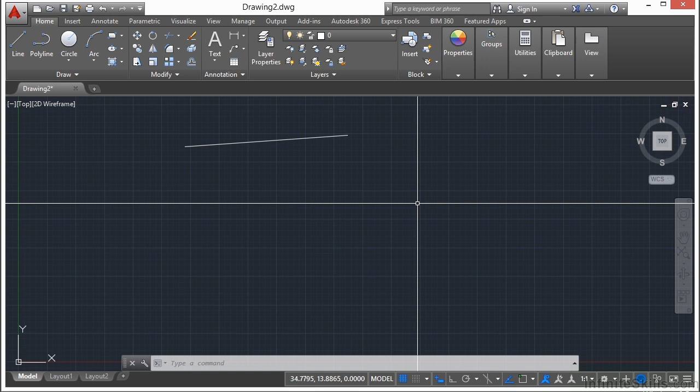So I'm going to erase this line here so that we have a clean drawing to work on. So we're going to draw a horizontal line that's 50 feet across.

First, let's start with a blank drawing, and I wanted to make sure that we're working in architectural units. So type in the word units, press enter. Make sure we're in architectural and we're in inches, which we are. And when you switch to architectural, the insertion scale should automatically switch to inches, but always double check it just in case. Everything we draw at 1 to 1, meaning 1 unit is going to be 1 inch long.

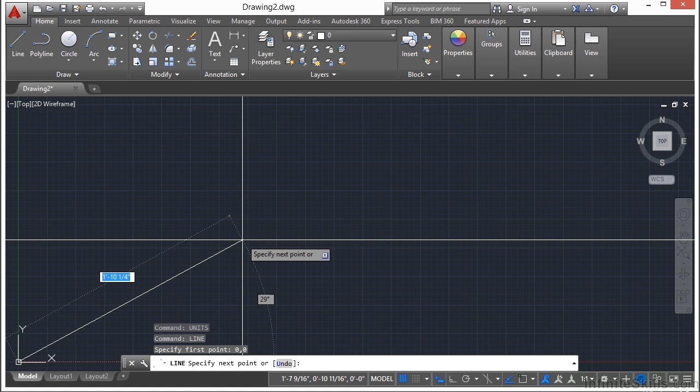So let's start the line command. Let's put our first point at the origin, or at coordinate 0, 0. Press return. You can pan and zoom to get close to it so that you are kind of in the right area.

Now what we're going to do is draw a horizontal line 50 feet to the right. Now there are a lot of different ways you can do that. You can turn on your ortho command, and that will lock you in orthogonally, or horizontal or vertical. And we want to draw it 50 feet to the right. Now remember, we're working in inches for our units, so if we type in 50, it will draw the line at 50 inches. But we want feet, so we can type in 50 and then put in an apostrophe or the foot symbol.

AutoCAD will say, okay, you're drawing 50 units. Oh, but these units are feet, not inches. Okay, I will convert it and do the math - it's real smart that way. And boom, there's our line.

I'm going to press return, then double click on my scroll wheel for a zoom extents, and here we go. We have our first line of our house that is 50 feet long. One way to check the length of an object real quick is to select it and then hover over one of the grips, and it will give you some basic dimensions. So we can see here it's 50 feet long, which is exactly what we wanted.

When you're working in architectural units, you draw in inches. There are 12 inches to a foot, so 12 times 50 is 600. You can type in 50 apostrophe like we just did for our 50-foot long line, or you can also type in 600, which is 600 units, which is 600 inches, which is 50 feet.

Now, if we needed to draw something at 50.5 feet or 50 foot 6 inches, you can. You just type that in as 50 apostrophe 6. No spaces, no separators, nothing like that. And it will draw it at 50 feet 6 inches.

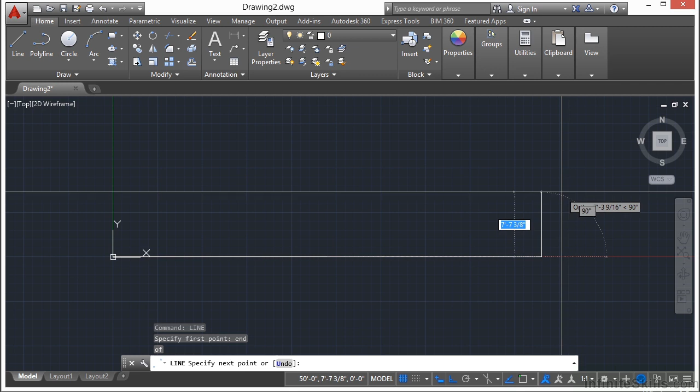Started from that end point of that line, and we want to go 30 feet. So type in 30 apostrophe. Make sure your cursor is moved up above the line here so that we can continue drawing up. Press return, keep the command going. And you can zoom out with your scroll wheel and pan around as well.

Now we're going to go back to the left, so we want to type in 50 feet, 50 apostrophe. Make sure your mouse is moved to the left before you type it in. Press return. And now we're going to do the same - we're going to go at 30 feet, but down. So press return again. And there's the basic outline for the front of our house.

Remember that glitch in AutoCAD that sometimes keeps you from zooming or panning? You can type in REA to refresh your screen.

Now we're going to draw the roof. It's just a simple triangle that we're going to do. Start the line command again, type in E and D for your osnap overrides, press enter, and snap to this point.

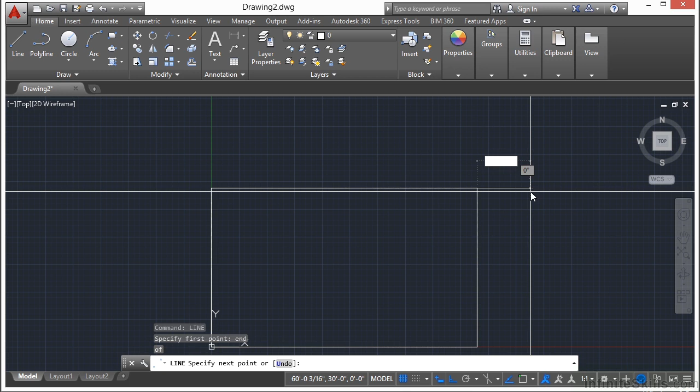And we're going to draw 5 feet to the right. So 5 feet, or again, remember we're in inches, so you can type in 60 for inches, but no inch mark - you don't have to do that. Press enter. That went over 5 feet.

Remember, you can also draw in polar coordinates, or more typically in relative polar coordinates. That means that you can draw lines based on length and angle. To do this, you again start the line command unless you're in it already. You pick your first point - right now, our first point is right here. And then with the dynamic input on, like I have on right now, you just type in your length, press the tab key, and then the angle.

Now, I've already done the math ahead of time, and I'm going to put the top of our roof right about here. So I know what has to be done. I'm going to type in 40 feet, then press the tab key.

Now I'm going to enter in the angle. Because my ortho command is on, it's going to automatically enter in angles according to every 90 degrees. So I'm going to turn that off with this toggle switch here, and now you can get a better look at it.

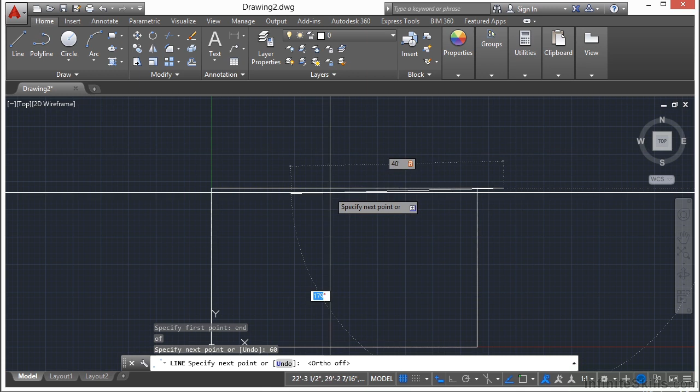Now remember, when you draw an angle in AutoCAD, 0 degrees is to the right on a perfectly horizontal line. 90 degrees starts here and then goes counterclockwise until it's straight up. 180 degrees is continuing on down to here, and that's where it goes. So remember, it starts on the right and then goes counterclockwise.

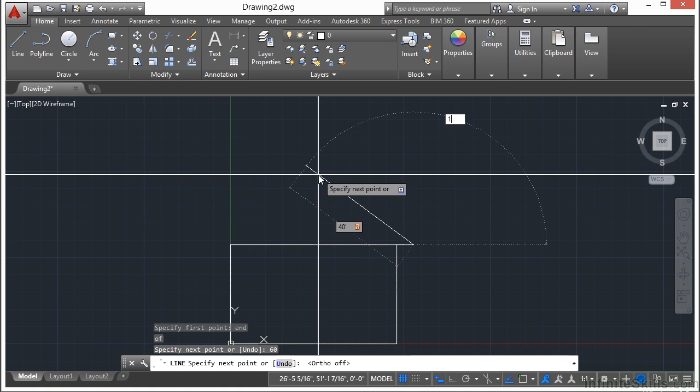So we want our angle to look a little bit like this. I've already figured out what our angle needs to be, and that's going to be 138.59. And there's our angle.

Okay, now I'm going to draw my line down in the opposite direction. Now I need 40 feet. Make sure you type in the feet, press tab. And I need to type in my angle.

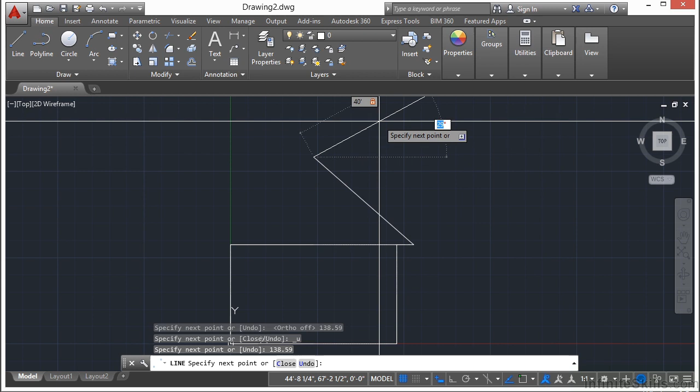Now, angles can get kind of tricky. Sometimes they can be relative to where your mouse location is. If I keep my mouse location in this quadrant, it may treat it as being negative. So I'm going to make sure I'm up here in this positive coordinate, and I'm going to type in 221.41 degrees. And there it goes.

Now I'm going to just snap to this endpoint, type E and D, press enter. Left click on that point, press enter again, zoom extents, and there is the basic outline of our house.

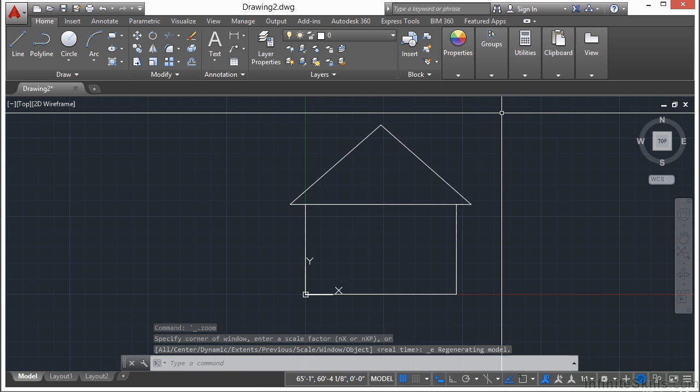Now this is very simple right here of what we've just done, but that shows you a lot of different ways that you can draw different lines using different types of methods. We did some absolute coordinates, absolute lengths. We used the ortho command to help us lock it in vertical and horizontally. We also used some relative polar coordinates, so we can draw in that way as well.

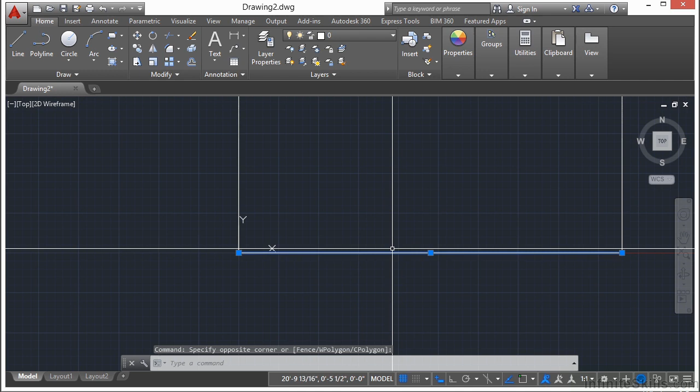Now, before we go, I want to review drawing with coordinates. If you enter in coordinates for the first point in your line, they will always be absolute, meaning those coordinates are where your first point of the line will be drawn. When we drew our very first line here, this bottom line, we started it off at 0,0. It knew exactly where to go.

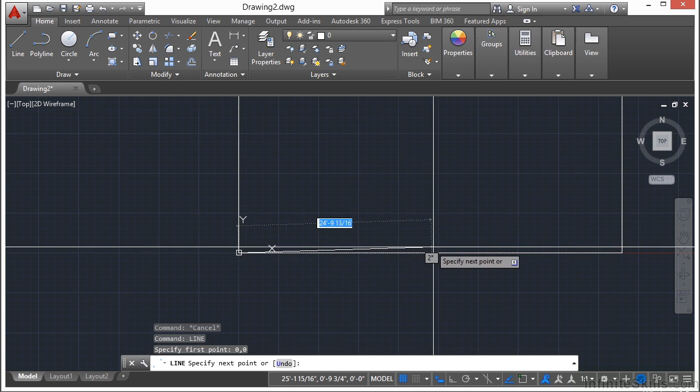That's an absolute coordinate. Now, if you enter in coordinates for the second point, they will be what's called relative distance, or that many units from your first point. So if I draw my line again from 0,0, press return, and let's say I want it to be 25 feet to the right and 25 feet up, so somewhere around this area, I need to make sure I tell it to go 25 feet over and 25 feet up.

So I need to start with the pound symbol. The pound symbol tells AutoCAD that the coordinates you are about to enter are absolute. So you type in 25, comma, 25. I didn't hit the feet, I hit inches instead, but that'll still work fine for our example. So now these coordinates are at 25 and 25 inches, which is 2 foot 1 inch and 2 foot 1 inch. You can see that's the way it is on our coordinates in the bottom center of my screen.

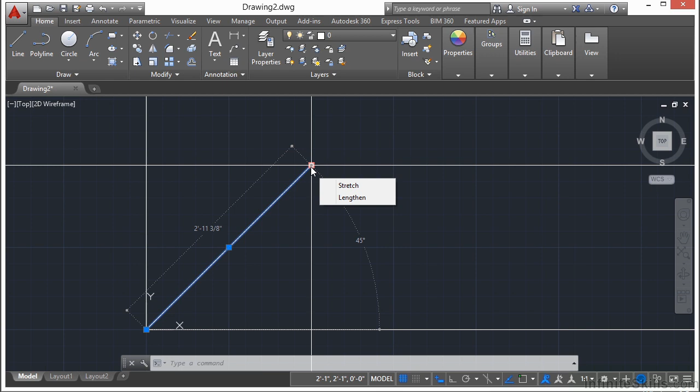Lines are simple objects, but there are many ways to draw them. That gives us several methods to make sure that we accurately draw the information that we need. And we do that based on the information we already have and by knowing what it is we hope to achieve in our line work.